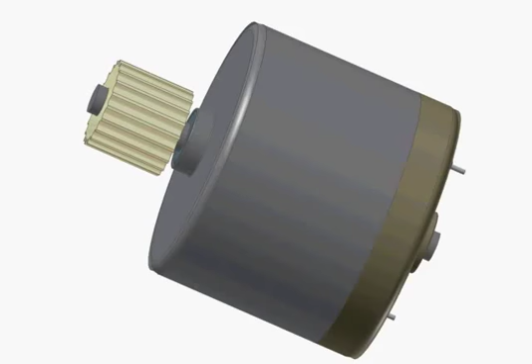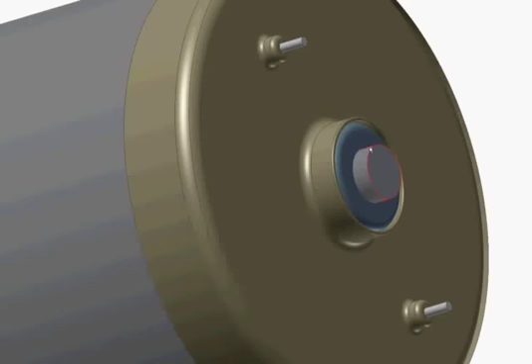Today I will show you what's inside the DC motor. Now I have prepared my work model for DC motor for this reason, and as you can see this is fully functional. It can rotate either way, clockwise and counterclockwise, and on the back side you can see the bearing that holds the shaft and the shaft itself and the two poles that the motor is powered from.

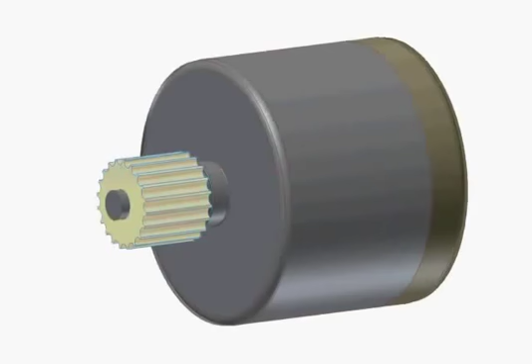Now, instead of breaking the motor apart and explaining each part as I take it out, I would rather prefer to go backwards, and I will start from scratch and build the motor from the beginning. Okay, now I strip the motor and there. Nice. So, this is the basic part of the motor. This is the shaft, and on the shaft the two electromagnets are welded. Actually, these are only the cores of the electromagnets.

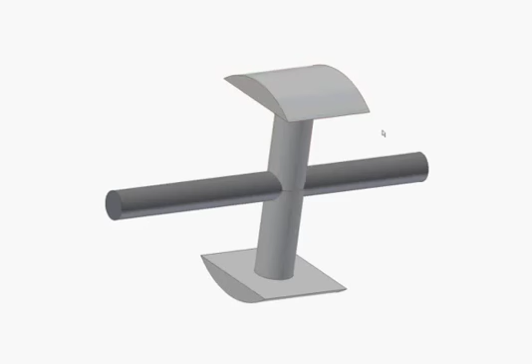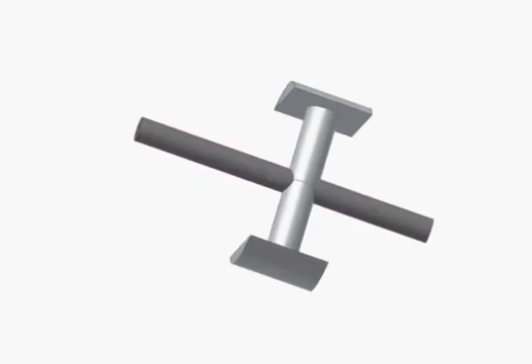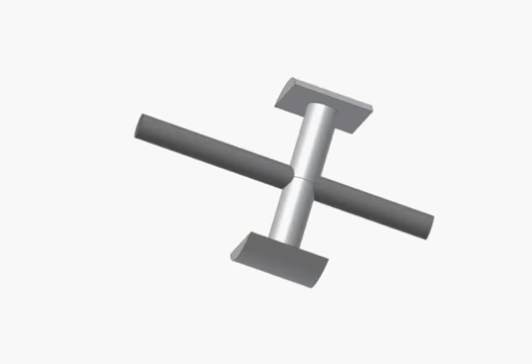They still lack the coils, and the coils are actually the ones that I will start with making the motor. The coils are made of thin single core wire from copper most of the times. It has no plastic shielding outside. Instead, it has a special paint, and this will prevent the short circuit between the windings. And there. Now, this will be the first coil of the electromagnet.

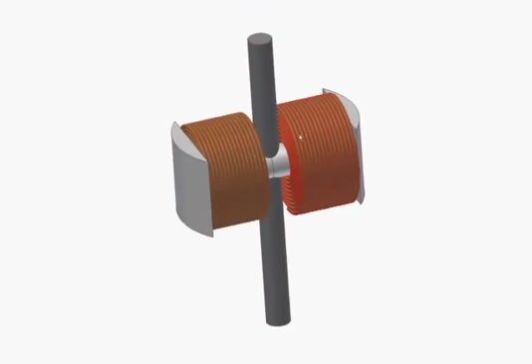The motor has actually two electromagnets, something that does not happen in the real life. But this motor is made only for educational purposes, and I try to keep it as simple as possible. So, this is our electromagnet, and now it's starting to look like a motor again, and it's time to give some power to the coils. This is the tricky part of the DC motor. So to provide the power, I need to build something that's called commutator.

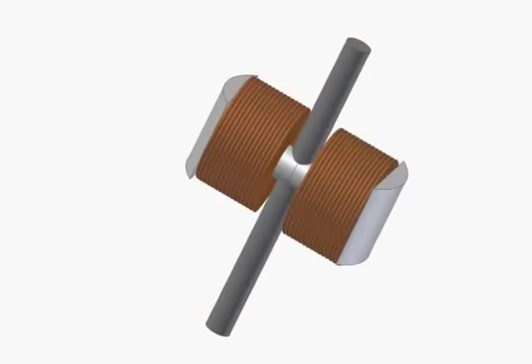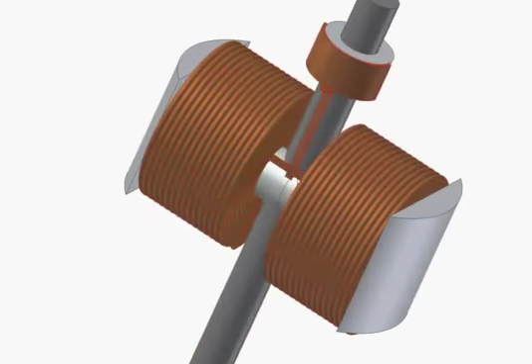The commutator is actually a ring. This ring is above the electromagnets, and it's fixed on the shaft. This ring rotates along with the shaft, and the ring is made of non-conductive material. This is very important. On the perimeter of this ring, there are two other parts that are made of conductive material. This is the first part of the commutator, and it must be able to stand friction in high revolutions. You will see later why.

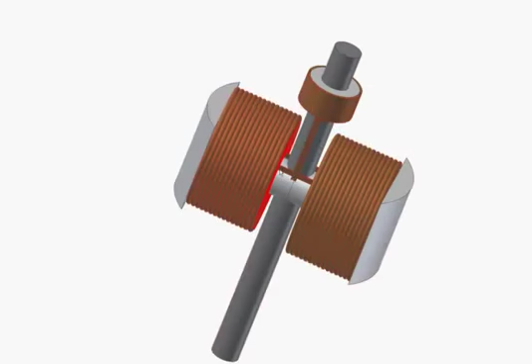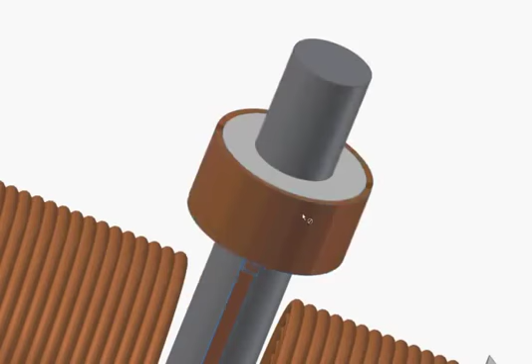Now, on the other side of this ring is the other half of the commutator. Again, it's made of the same conductive material. It has the same wire to provide power to the coils, and now both electromagnets have their wire endings connected to the commutator. Now look closer to these pieces. They're actually not connected together. There is a gap between them. And on a real motor, this gap is times smaller than a millimeter. On the other side, there is the same gap.

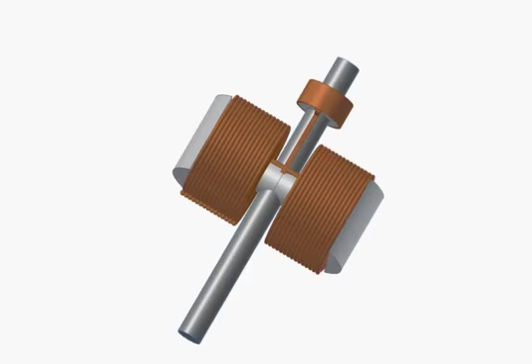And now, let's take a look around. So, we've made the commutator piece. Now it's time to put something to hold the shaft in position while rotating. And what could be better than a set of nice ball bearings? There. The motor has actually two bearings, one above the commutator and one under the coils. The bearings are very important on the motor, and actually the bearings along with the brushes are the parts that wear off on the motor. Now enough with the bearings.

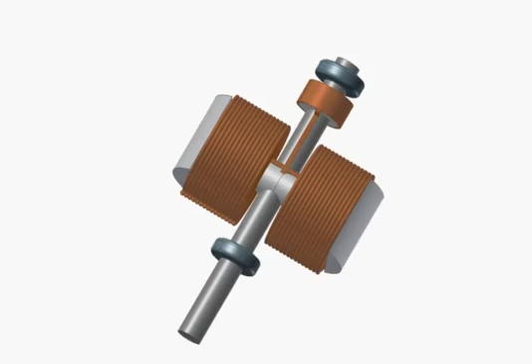Now, according to the theory of operation of these motors, the electromagnets rotate inside the magnetic field. So now we need to make a magnetic field. And this field will be made out of two permanent magnets placed one opposite the other. Now this is the first piece. This piece of permanent magnet has its north pole facing the coils of the motor. The coils will rotate in front of this magnet, and it will be actually in a very close distance, about 1 or 2 millimeters for small motors.

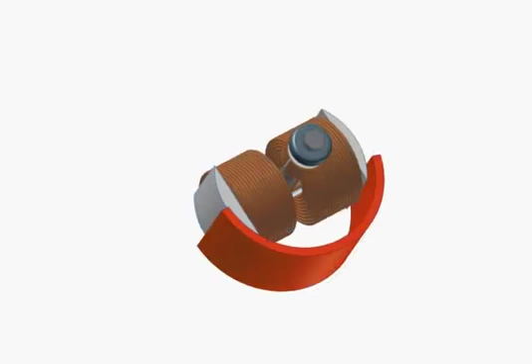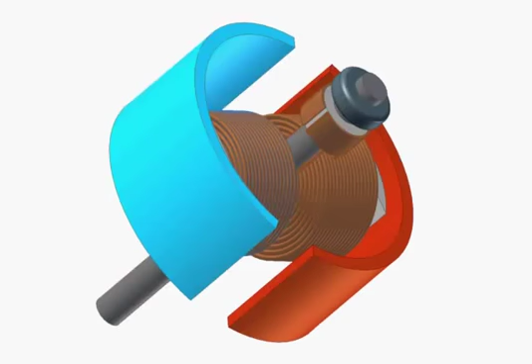And now we need the other half of another magnet with the other pole facing to the coils. Now this one. This magnet has the south pole facing to the coils. So between these two magnets there is a permanent magnetic field, and the coils will rotate inside this magnetic field. I will continue making my motor. The internal parts are almost ready. What I need now is a way to provide power to the coils while they rotate.

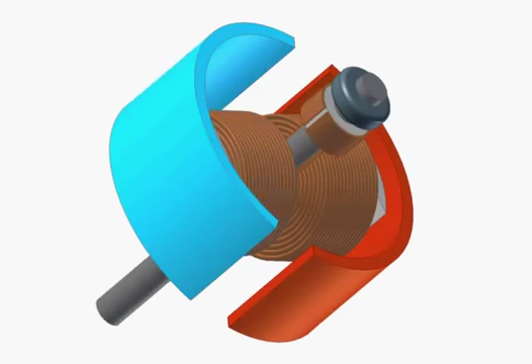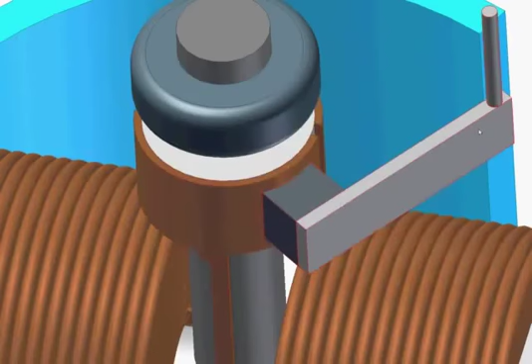Now remember that the poles of the windings of the coils are both connected to the two pieces of the commutator. Now there is another part called the brush, and this is actually why this kind of motor is called brush motors. The brush is a piece of metal that acts like a spring. On one end there is a conductive material very durable with friction, like the one used for the commutator. Usually this is made out of carbon. Now the metal will push this piece on the commutator, and so it will create contact between these two.

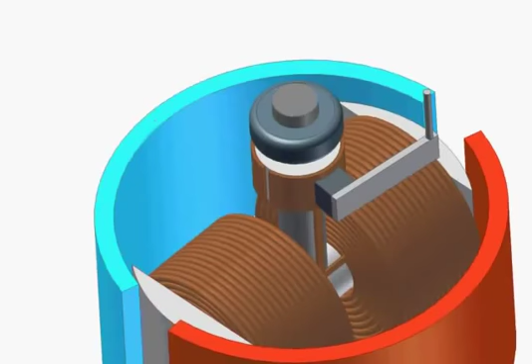On the other end of this metal there is the power connector of the motor. This is where you connect the power actually. The current goes from the power connector through the metal spring and through the carbon connector directly to the commutator, and then it's provided in both coils. And of course there is another brush opposite this one, with the same structure of operation. It will give power to the other piece of the commutator.

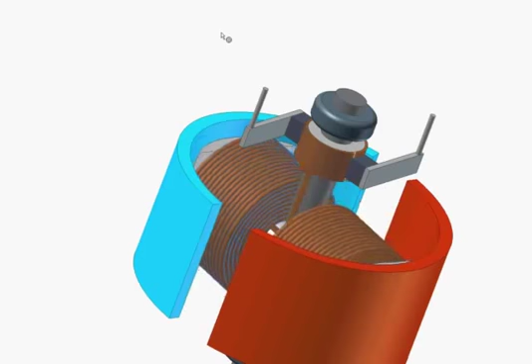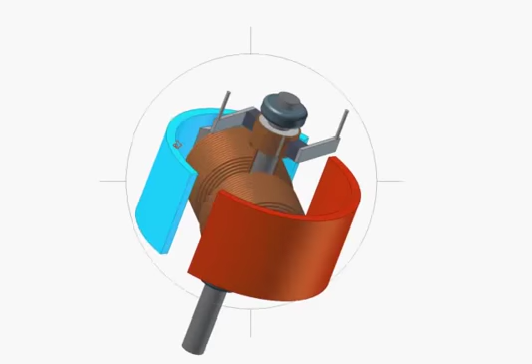Now watch what happens while the shaft is rotating. The brushes have always the same polarity as provided by the power supply, but as the shaft rotates, the polarity driven to the coils is changed, because every time, for example, the left commutator goes one time to the positive and one time to the negative power supply, and this is how the electromagnets change their polarity. That's the tricky part of the DC motor.

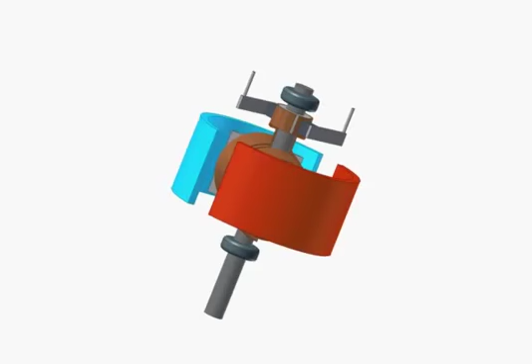Perfect. Now it's time to put it all together, and I will put the housing of the motor. It has a proper place of course for the ball bearing, and the electromagnets are also fixed on the walls of this housing. Now that's the housing, and our motor is almost finished. It looks nice. It's time for the final part. I don't really know the name of this part. I will call it a cover.

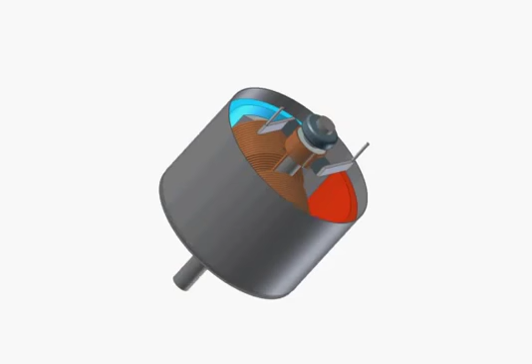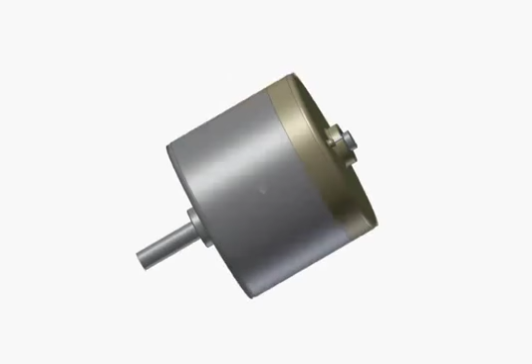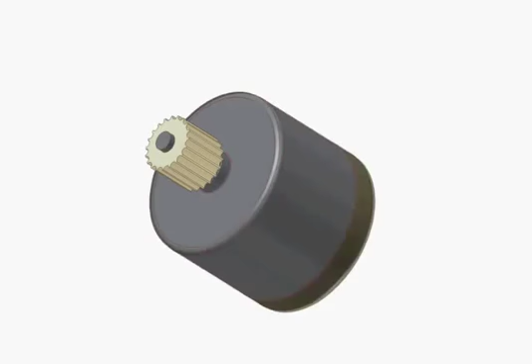Actually it's a cover. It covers everything, and it also has a place for the bearing on top. It will hold the bearing on top, and it also has two holes for the power terminals, and the motor is ready, fully functional, everything in position. That's it.